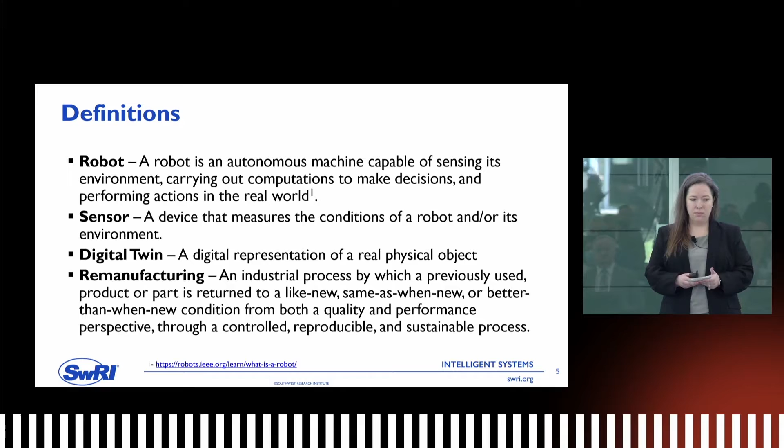So let's start with a very simple example of how robots help with sustainability. In the normal paradigm, let's take sand casting. A part is cast in sand. It's roughly accurate to the dimensions that it was planned to be. And the sand casting process does not allow for precision measurements. So certain holes and other manufacturing processes require a human to then do additional post-processing once the part has cooled and hardened.

Humans make mistakes, so there's inspection. And when there's inspection, sometimes the parts fail and either have to be scrapped or they have to have rework. And if it's rework, it takes more money, more energy, more time, and then you get a finished product.

So if you take that same example and you substitute in a robot, it's able to do what that human was doing in this example, grinding or boring a hole, and it will do the exact same thing every single time. So if the manufacturing process ahead of the robot does not change, then what the robot will do to that part will not change either. And you will get the same part. You should probably still inspect, because that's always a good practice, but that part should pass every time.

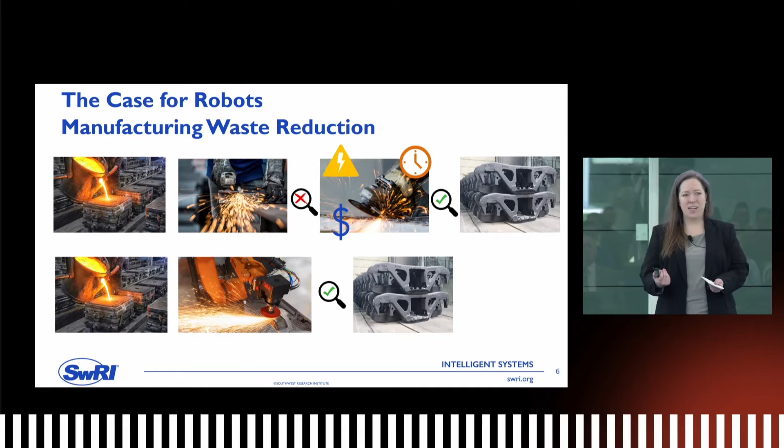I recently found a case study that talked about an engine manufacturer, and they substituted a robot in their cylinder head processing, and they were able to reduce their defect rate by 50% by using a robot instead of a human. That increased their productivity by 25%. That saves energy, that saves time, that saves money, that creates a more sustainable manufacturing site.

Less energy. Robots consume, in general, less energy than a human performing the same process, both because the robot is going to be able to do it more accurately each time, but also robots don't need some of the creature comforts that we as humans need to work in high precision environments. For example, it's about 70 degrees in here, Fahrenheit, and we would be absolutely losing focus if it was the same temperature as outside. Robots, in general, aren't going to care as long as their process is optimized to handle what environment they're working within. It doesn't matter.

They facilitate things like a lights out factory. Now, that doesn't mean that the entire factory has no lights on, but the areas that are predominantly held by robots are going to not need all of the HVAC, the lighting, all of those other things that a human does. Robots also don't drive to work. I don't know if you knew that, but that also allows factories to be further out, allowing you to have a beautiful city like you have here in Monterey. And so it allows those facilities to be further out.

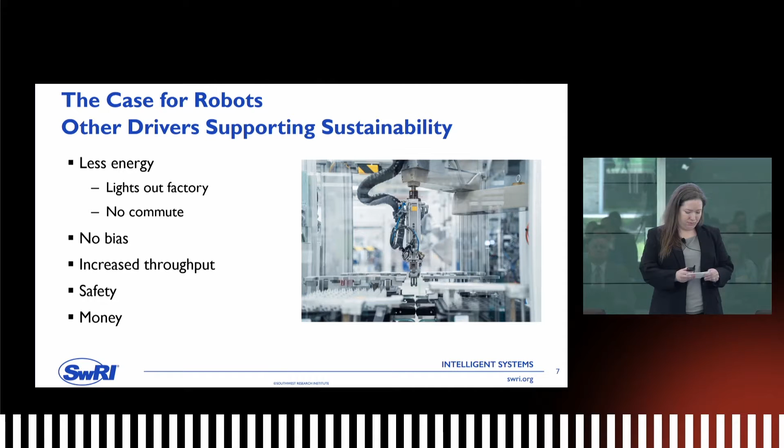This is possible. In the past, even today, the majority of carbon fiber layup is done by humans. Those humans tend to have significant quantities of repetitive stress injuries, which is not a good thing, because then that highly trained, highly skilled employee can't do their job anymore. And we need to not have that be what happens.

We also have the ability for robots to help with additive manufacturing. Typically, additive manufacturing is a 2- or 3-dimensional robot. It's on a gantry, and it can go up and down. But then post-processing of additive parts can also be done with robots. There's also a new field that's emerging called metamorphic manufacturing. That's a robot doing blacksmith operations. This is not a new technology, but again, it's a very dangerous, very hard, very high turnover technology that we want to help enable people to not have to do so they can do other jobs.

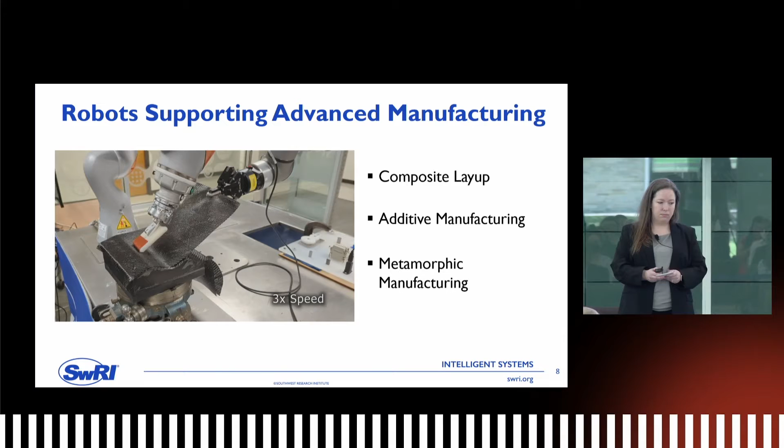So far, I've been talking about robots that are programmed to do one specific thing repetitively, over and over again. Now I'm going to talk about some of the ways that we can create smarter, more intelligent, more adaptive robots. My team has developed what we like to call Scan 'N Plan, and it is a fusion of robots with sensor technology to increase the intelligence of those robotic solutions. And it is the foundation for production deployment for high-mix and low-volume applications, where previously it would have been infeasible to put a robot into that sort of facility.

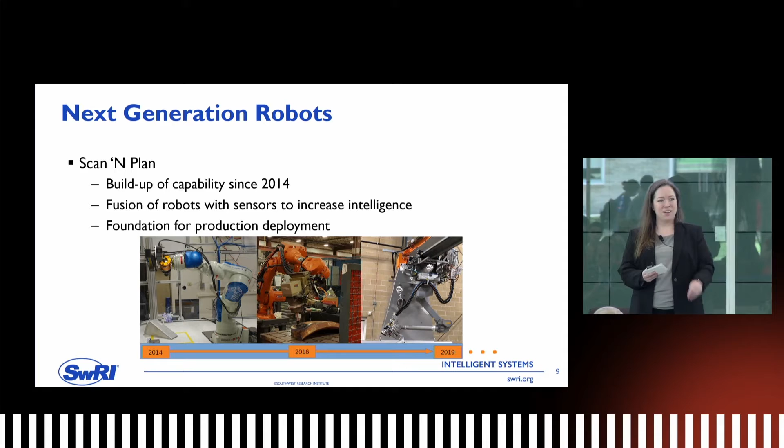These robots are able to see what they're working on. So when you include things like artificial intelligence or machine learning, they're able to have enough understanding to know when to stop processing a part. So previously, if a carbon fiber part was needing to have paint removed from it, a human would have to do that sanding, because the human would have to say, I've sanded enough, I'm going to be done. But now a robot can say, I've sanded enough, I'm going to be done, because I'm starting to see that carbon fiber peeking through.

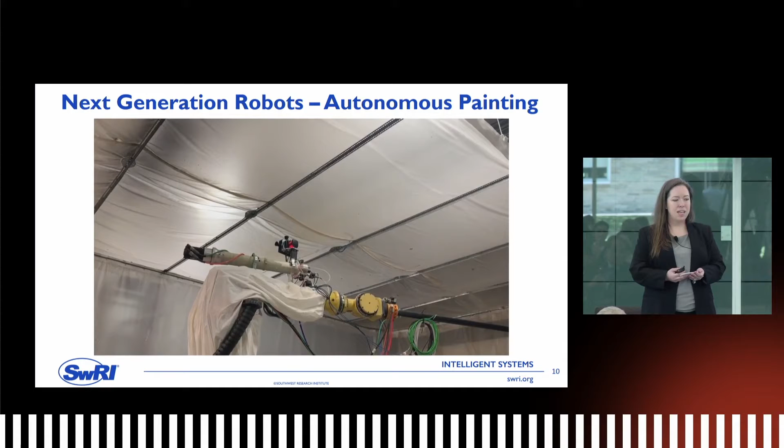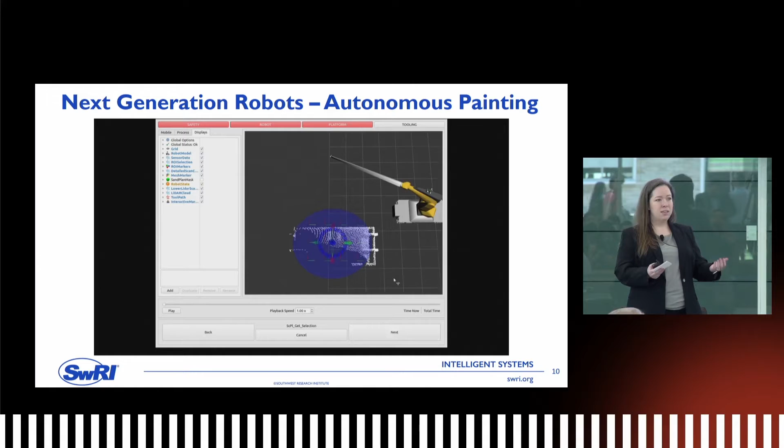So here's an example of a Scan 'N Plan application. This is a robot that is going to autonomously paint an airplane wing. So it starts out with a LiDAR-based scan. LiDAR is a laser detection and ranging. And from that, it creates a point cloud.

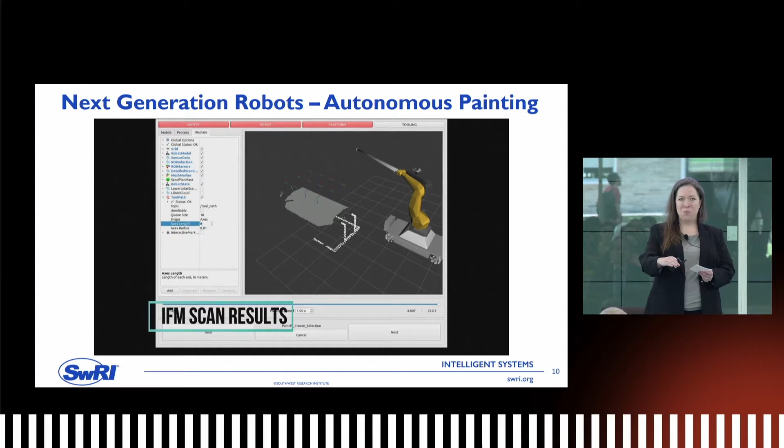The point cloud is used to detect collisions so that the robot can go in and do a higher detailed scan with a 3D camera. We want to get close to the surface, but we don't want to hit the surface with the 3D camera, because then we'd be out a 3D camera. So the 3D camera information is fed into the system, and it creates a mesh. A mesh is basically a solid model of the surface of that part.

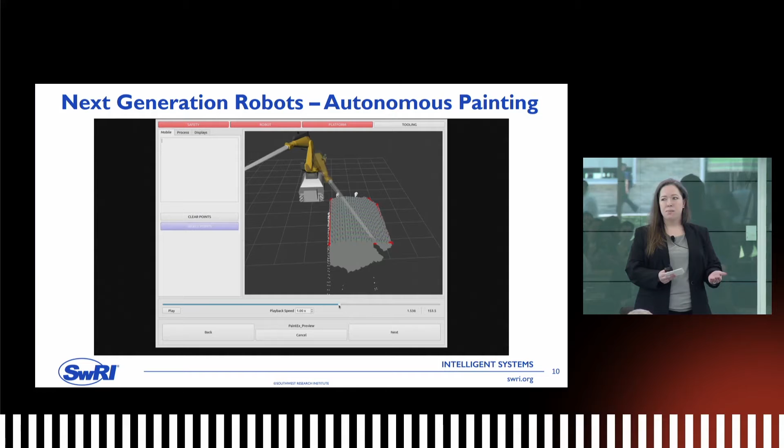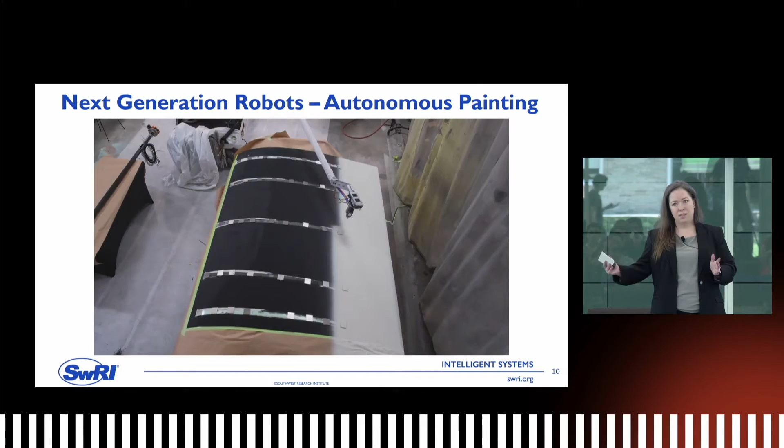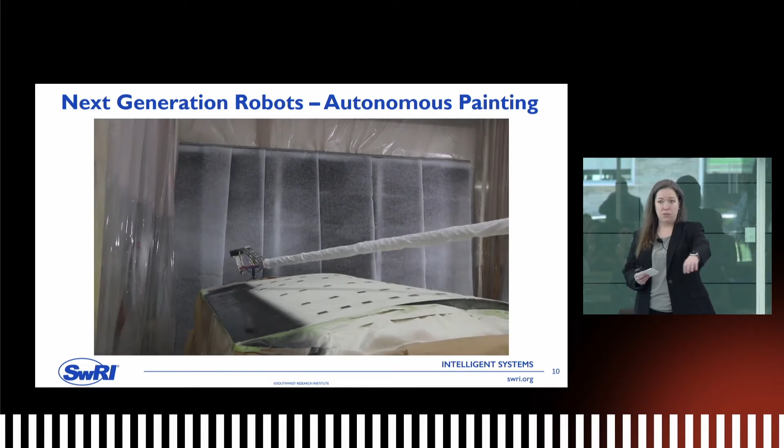And then it starts beginning to plan the process by finding the normal points to the surface and then creating paths between all of those different points. And then using open source software like MoveIt or TrajOpt, it's able to figure out how the robot is going to move through each of those points. Then it paints an airplane wing all by itself, never having seen an airplane wing ever before in the existence of this robot.

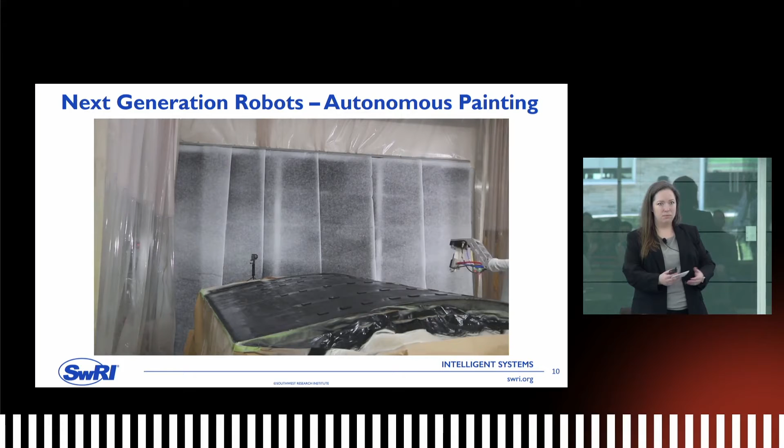This is extensible to more than just painting. It's extensible to grinding, cold spray, welding, and many other processes. The neat thing is this saved 30% of the time of a professional finisher. So somebody who paints wings every single day took 30% more time than the robot did. And the robot was able to achieve a much more consistent thickness of the paint across the whole surface.

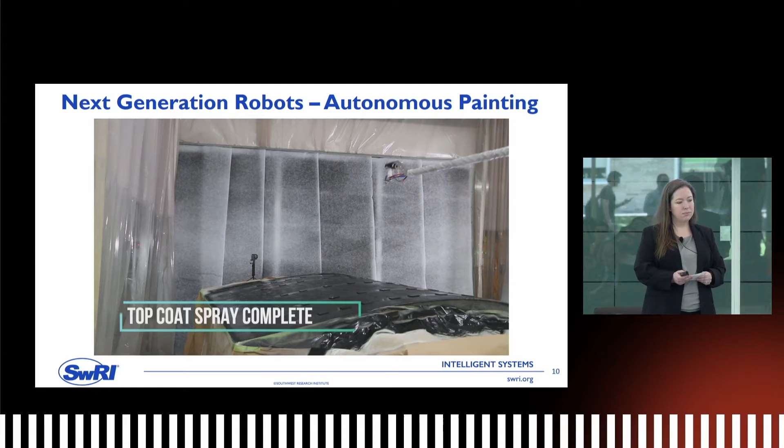All right, the next topic is digital twin. And so that last video, I showed you how a mesh could be recorded to provide a digital history of that part. You could record information such as the processes done to it. You could record any inspection history. You could record repair history. And this is not useful for all parts out there, but it is useful for serialized and important parts.

So in the near future, we can use those records to inform companies when preventative maintenance should be taken. Earlier I said that robots don't get sick and don't take vacation, but sometimes they do need maintenance. And maintaining a robot or any other system, like an aircraft engine, is much better to do before something breaks. Breaking things can be catastrophic.

So further down the line, we can use digital twin information to inform on other parts that have failed, so that when a part goes through an inspection and that inspection is compared to a part that failed and its inspection history, a company can better understand when that part should be removed from service permanently or when it should be fully repaired instead of let to go back in.

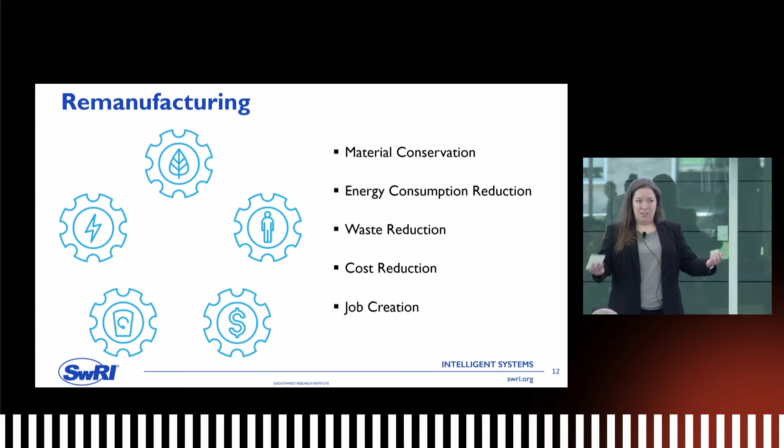Job creation. 450,000 people today are employed in jobs where remanufacturing is a part of their job description. It creates jobs. It doesn't get rid of jobs. This is probably my favorite robot ever. It supports a remanufacturing application. It supports sustainability. It supports all of our goals with advanced technologies, advanced manufacturing.

Roughly every 5 years or so, airplanes need to have all of their paint stripped. They need to go through an inspection to make sure that there aren't any significant cracks on the skin of the airplane that would cause catastrophic damage. Airplanes falling out of the sky, kind of a bad thing.

Today, airplanes are stripped by one of 3 methods, or a combination of those. Chemical stripping: chemicals create some toxic residue, toxic wastes. Sanding creates sanding pads that are now waste. Or grit blast creates waste of the grit blast media that is used to remove the paint from the airplane. All 3 of these are not so great.

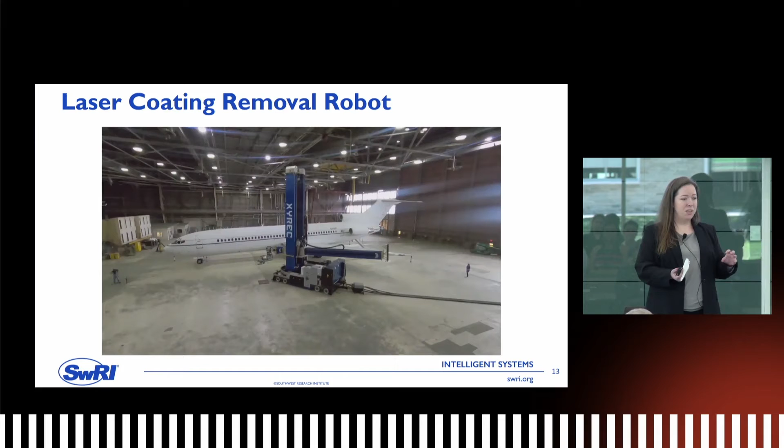Boeing says that it takes about a week, a little bit more, to remove paint from an airplane the normal way. What we've developed is a carbon dioxide-based laser stripping robot. It has a vacuum that sucks up the paint that's being ablated, removed from the airplane, and the only waste is that paint that's being taken off. So there's no more additional consumables. This takes 3 to 4 days.

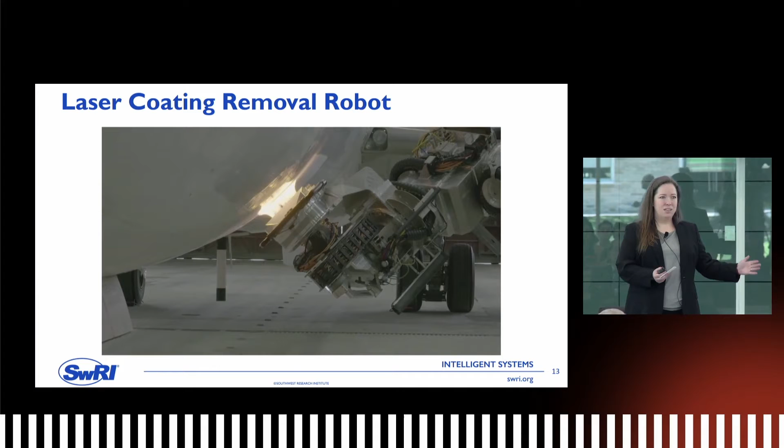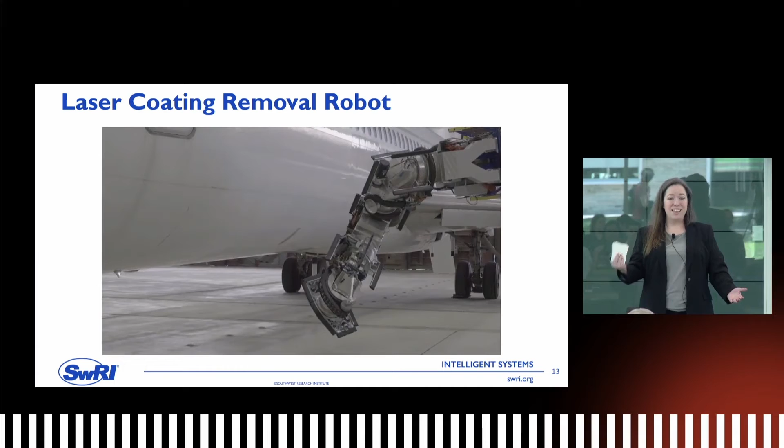Carbon dioxide lasers do take a lot of energy compared to somebody grit blasting, but you're able to do the whole plane in 3 to 4 days. So all in all, it is a savings on energy, which is more sustainable.

So far, all of these robots have been really big industrial applications that support manufacturing. Now I'm just going to talk about some very, very small robots, again, based on that definition that we explored about a half an hour ago. And these robots can be used to support sustainable manufacturing too. These are sensors with switches in them that can be used to control the environment. They can be used to control electrical usage. They can be used to control water leaking when it's not expected to.

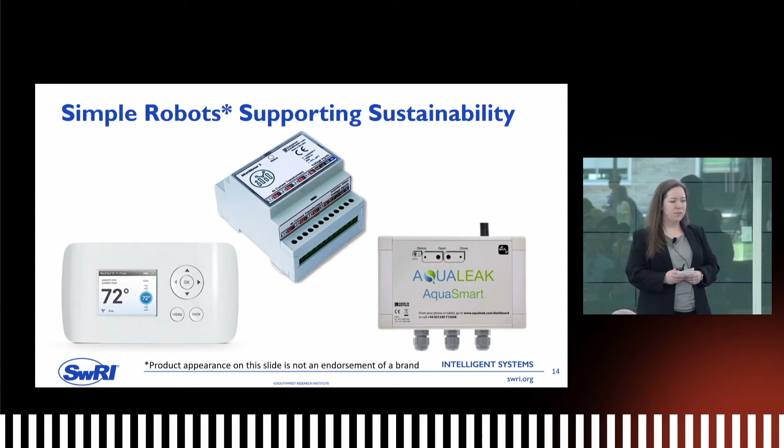All of these are wasteful. All of these reduce sustainability. All of these increase our carbon footprint. So even something as simple as an occupancy sensor for a room can turn off the lights after everybody's left. That little extra percentage of energy usage that's avoided by the sensor turning off the lights helps. Now, I hope that you all agree that robots are a technology for today and the future for sustainable manufacturing.

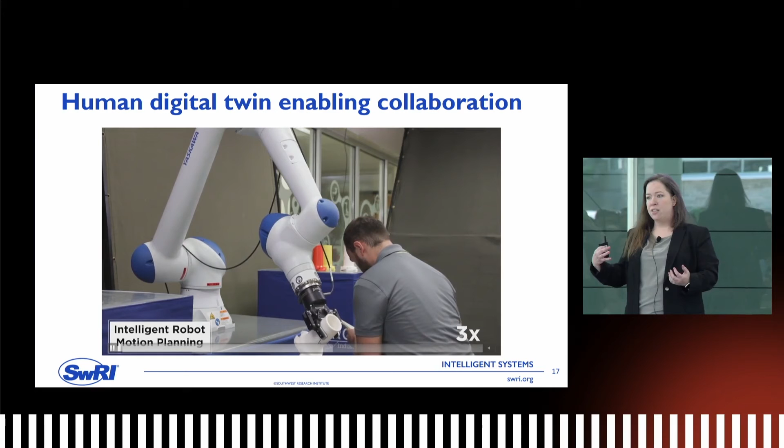So the robot is supposed to be going right through where my colleague Ben is, but instead it goes around him. You can see the exoskeleton, or the skeleton that it has kind of created, and that's how it's detecting it. So yes, definitely think that humans have a place with robots. It needs to be done very safely.

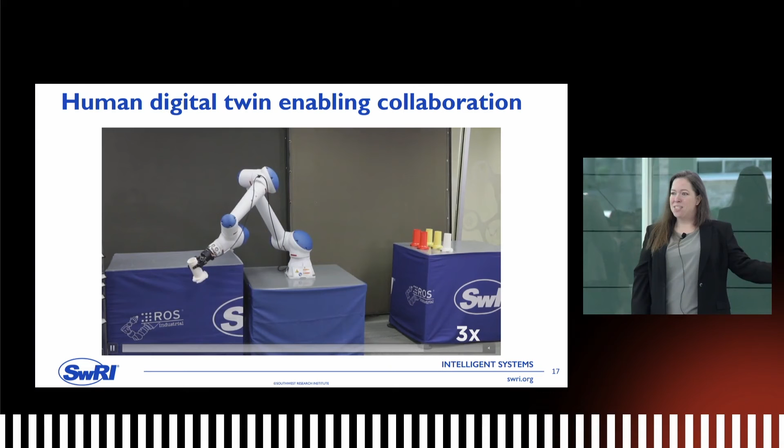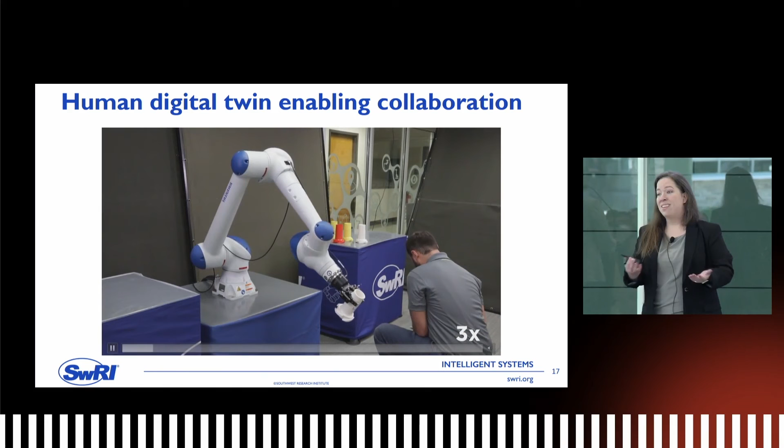Right now we're doing it with collaborative robots because the collaborative robot is force and speed limited. But the goal is someday in the future that even an industrial robot maybe doesn't need to live in a cage or behind a light curtain. And that's definitely a future that has significant opportunities for increased productivity.

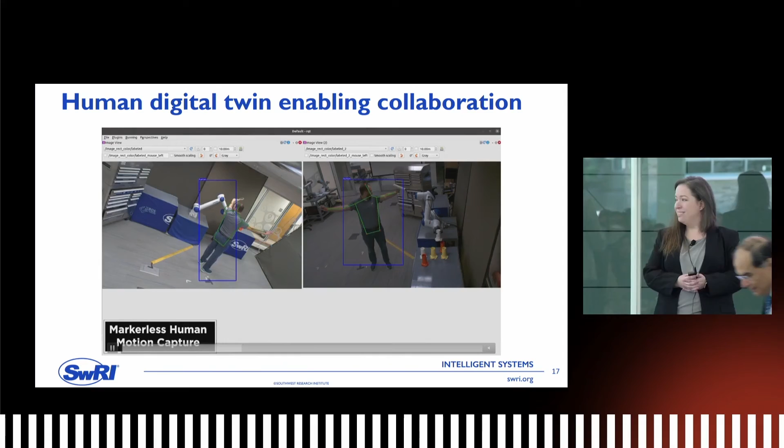How much time, money does it take to train employees to learn to operate robots? Well, it depends on what kind of robot we're looking at. For a very simple, repeatable process, there are people who can be trained to do that in weeks. My employees create very advanced applications for robotics. They all have 4-year degrees that support that. And it takes them a half a year to a year of on-the-job training to be really, really good at it. So there's a huge array.

Thank you. Thank you. ¿Una pregunta más? Okay.

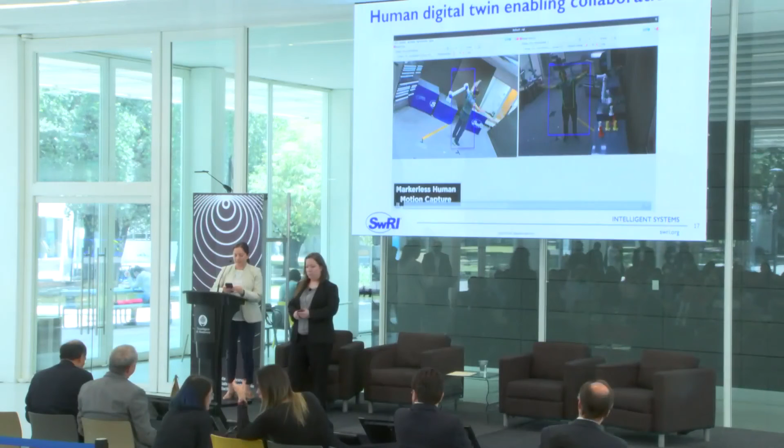One last question. Could they be used to automatize the maintenance on buildings? I'm sorry, what? Could they be used to automatize the maintenance on buildings? Oh, yes. Robots can definitely be used to automate the maintenance of buildings. So there's a startup in Austin, it's a city near San Antonio where I live, that has a robot going around disinfecting rooms at hospitals.

There are window cleaning robots. There are robots that can go and do a thermal IR view and look for cracks or places where energy is leaking in and out. So there's definitely more applications that can be created. Your imagination is the limit of finding those applications.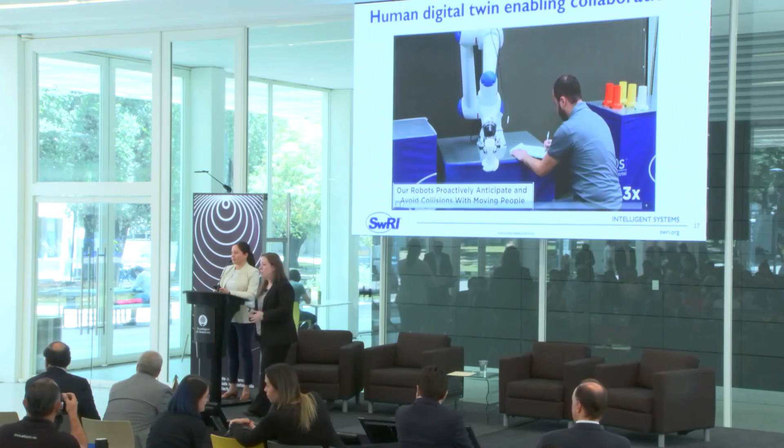I am so curious about the role of robots in the metaverse. In the virtual reality, because you show a lot of examples, physical robots, but in terms of virtual robots, what is the main role of those robots? The role of the robots in the metaverse? Yeah, in the metaverse. Because companies are moving over there. So again, by the definition that we used at the beginning, the metaverse is not a physical thing, and so they're not really doing anything in there.

However, there are augmented reality and virtual reality applications that robots can be used in, especially long-distance inspection. So perhaps a part needs to be inspected and the inspector doesn't have enough knowledge to decide that the part has definitely failed, and so they need somebody who has even more experience. And a long-distance inspector from another facility could use their AR headset and look at all of the different parts of the part and zoom in and even perform a CMM sort of inspection through augmented or virtual reality.

One more question. So do you see that as a good training for people so we can really do better our work of programming or enhancing the robotics and the human labor, using this type of new technologies? Do I see evolution of the way that we're training? Yes. That's a great question.